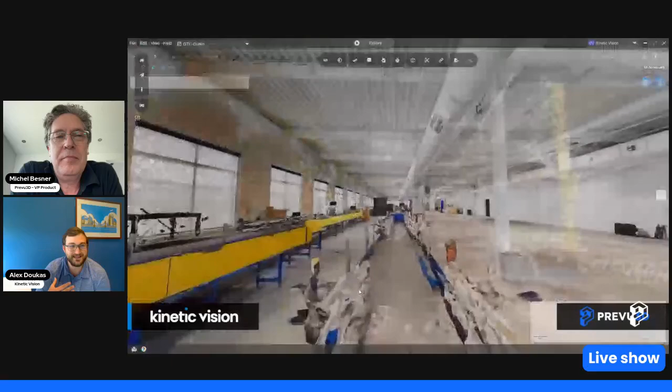So we actually presented this video at GTC. Like Michel mentioned earlier, we did a collaboration booth at NVIDIA's GTC. I actually personally got to meet Jensen Huang, which is amazing. We utilized a NavVis scanner, a VLX3 that we have at Kinetic Vision, to go ahead and digitize our upstairs manufacturing space.

So we have essentially a physical replicate of a conveyance line that we wanted to better understand, and basically replicate in a digital environment within the space. And the first place you start is with data acquisition.

We support a variety of different acquisition modalities. I think one of the most important parts of Kinetic Vision is that we use the right tool for the job, whether that's hardware or software. When it comes to hardware, understanding the problem statement is so important - understanding any accuracy requirements, what level of fidelity is needed, and different levels of transparency or complexity to different pieces of equipment or macro level environments you're trying to capture.

We utilize terrestrial scanners, like I mentioned, our VLX3, which is a SLAM-based LiDAR capturing system. We use photogrammetry, Gaussian splat, which is a newer technology that's really interesting - it's almost like an interpolation of photogrammetry. Again, using the right tool for the job, in this instance we're using our VLX3 to capture our upstairs space.

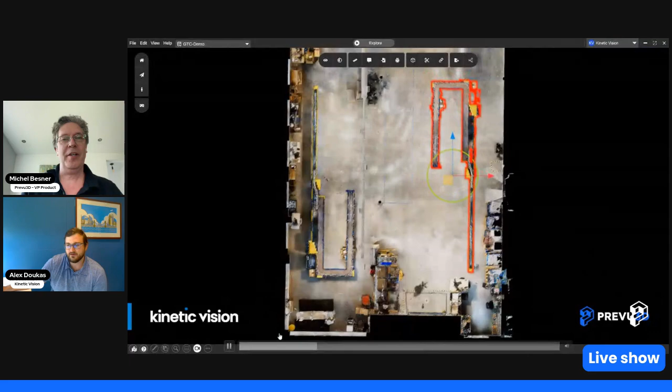From there, we utilize - and I'll play the video again here - Prevu3D to go ahead and actually activate the data.

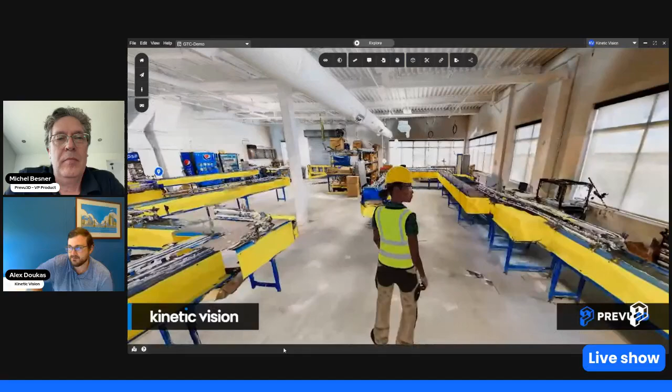So when I say activate, that can mean a few different things - anything from reconfiguration of different components, like you see on the screen here, to measuring, to sub-segmenting different things, to actually creating assets and annotations of different segments. This really just helps enable an immersive experience where anybody from VP level to boots on the ground can interactively engage with it.

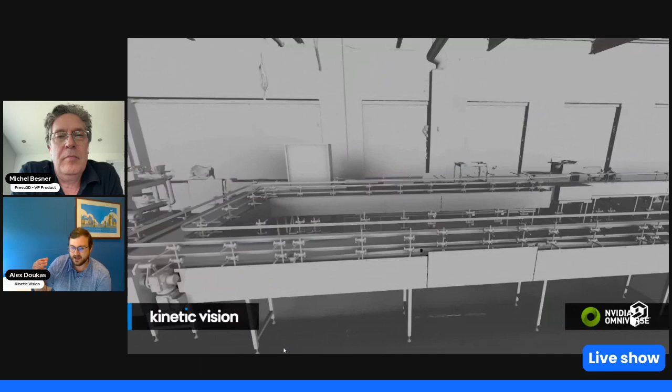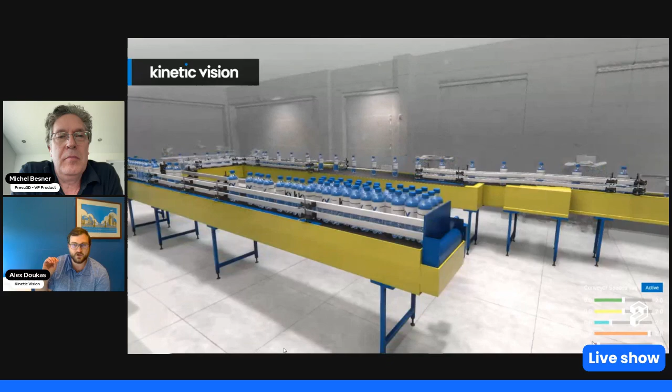And then we get on to the next stage where we focus on optimization. I mentioned COVID earlier - I think one of the biggest highlights we noticed is an industry shift or mentality shift from research and development to more of a focus on production optimization. Focusing on production optimization, R&D can help facilitate that.

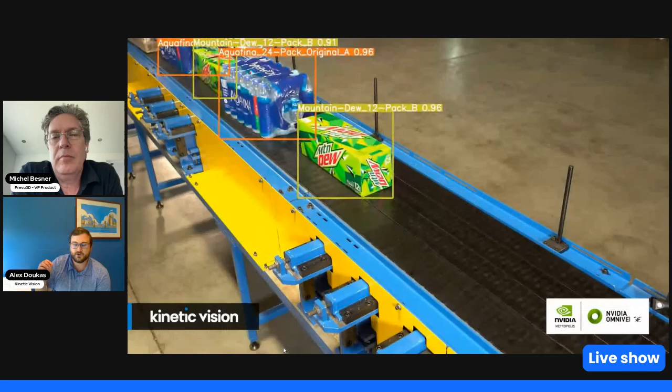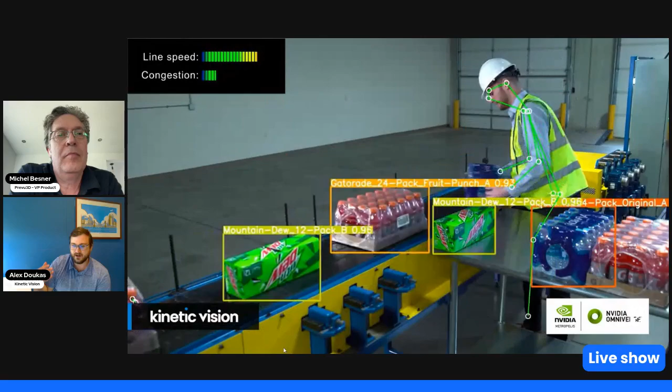We utilize tools like Omniverse, Unreal, Unity, to go ahead and create digitized representations of those different environments. So then you're able to actually activate them, optimize throughput, optimize how you're going to engage with that equipment, and then take it even a step further to do things like closed loop integration, closed loop PLC control, where you're using maybe AI or machine learning.

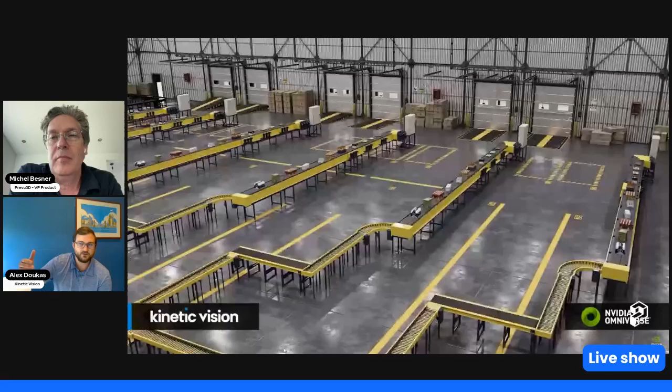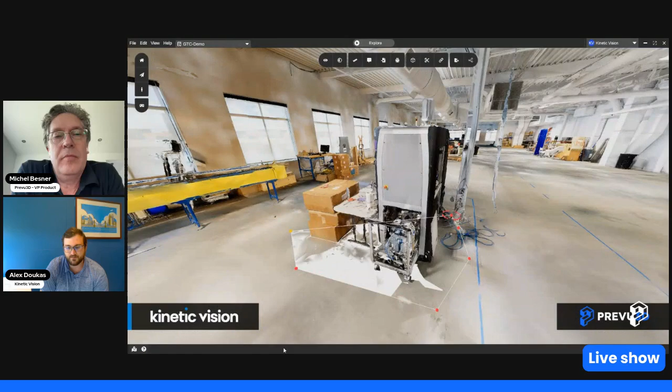You're using all the sensor infeeds from the data sources, from your lines, and then basically creating a centralized database to make decision making for you. So then you're not having to go ahead and tweak the dials based on need - you're allowing the system to act on its own, with more autonomy. That level of autonomy or integration really empowers production cells to not rely as heavily on their individuals, and it can make for a more efficient workflow.

Exactly. And what I love about what you were describing is that there's obviously a notion of choice and options in how things can be done. The word that comes to me is the notion of a trusted advisor. I think companies that want to digitize their facilities - there's not a single way of doing it, depending on the size, the complexity, the type of equipment you have, the type of use cases you want to address. I think that's definitely something I appreciate.

What your company is doing is really having this toolkit and these sets of different technologies and tools that, depending what you're trying to do, will be adapted. I think that's very important, because I feel we talk a lot about digital twin, but we often forget about talking about the maturity stage of a company.

And we assume that everybody is at the same stage. I like the example of a CRM, a customer relationship management system. Right now it's obvious most companies have a CRM because that's what you need to have, but 20 years ago it was still an optional thing, and it was very expensive if you wanted an SAP type of solution. Before companies like Salesforce.com came out with more accessible CRMs, it became basically commoditized. People now just have a CRM, there's some that are very affordable, and it's not a question anymore.

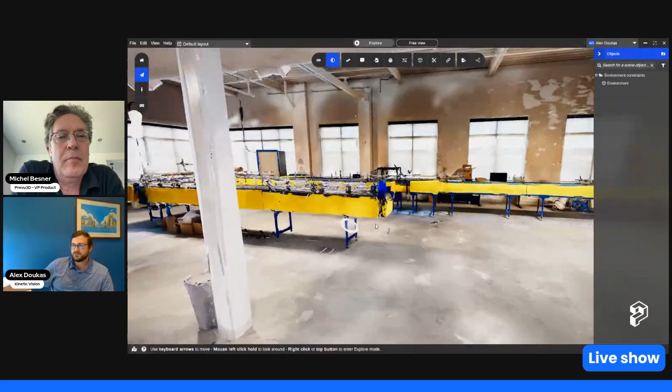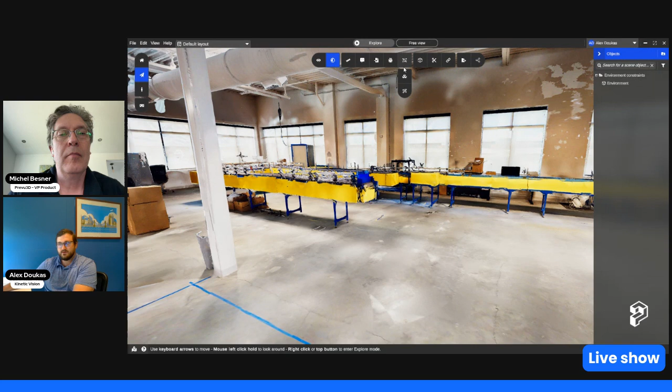So if I zoom into the actual scene here, you'll be able to see that conveyance line that we were looking at previously. You'll also see an ISBM system here that we work with in coordination with our line. But if we wanted to go ahead and utilize this data to recreate this asset, reconfigure it, or simply segment it out and use the segmented asset, there's a couple of different ways that we've used Prevu3D to skin that cat.

I've been really using the Asset Magic Wand lately to work through some more complex segmentation operations. So I'll go ahead and... there we go. I'll utilize this to select the different surfaces, and it's been a really nice tool to help visualize the actual segmented surface that I'm about to extract for digital twin development.

It is very quick, yeah. And then you can go ahead and start to define the different components that you want included. And then I can rotate it so I can see what's being included down here.

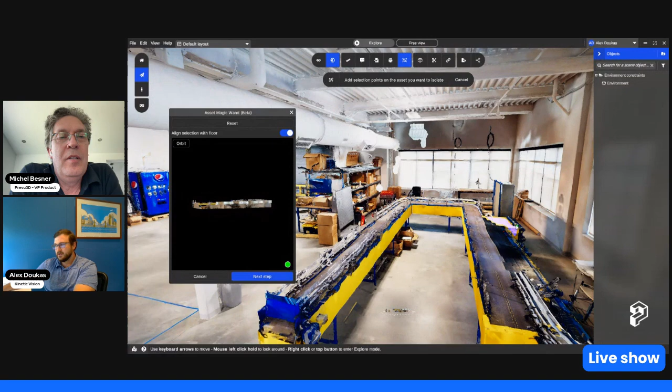And I think it's a great example because assets in manufacturing sites are complex in shape. There's a lot of solutions out there that use a single rectangle to define the asset, but here you're able to define a much more complex environment with just a few clicks. That's exactly right. We've likely captured a majority of it at this point, which is great.

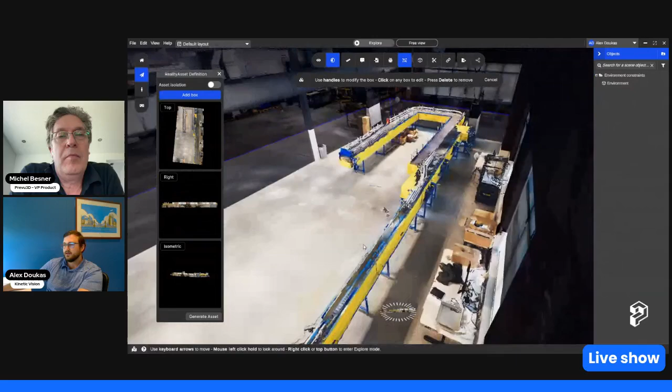So then you have that defined as an asset, and you can go ahead and even redefine the bounding box should you want to. So I can go ahead and rotate this. Just like you said, this allows a lot more flexibility. You can also do this with the box methodology or even the cut methodology.

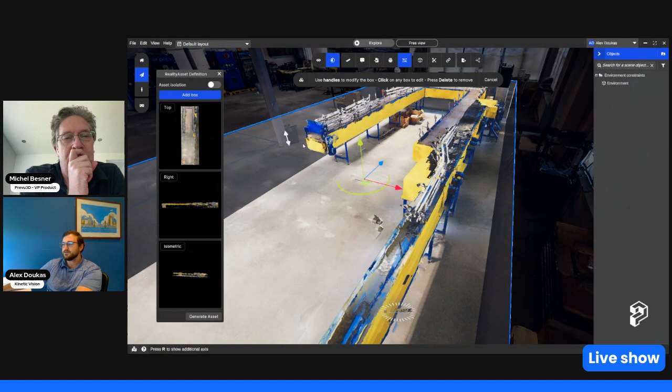But this is a great way to have the asset recognized as an asset, and then utilize this. Let's say someone is trying to understand where this conveyance line is among a 1.5 million square foot facility. They would have the ability to search based on the name, but then we can add different things like different properties. We can add different components. We can say line speed.

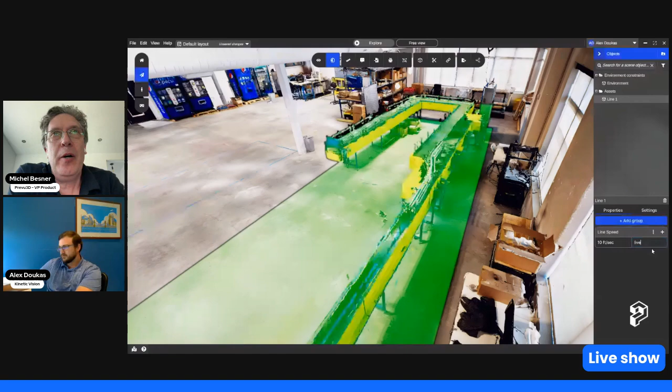Let's do 10. It's a great example you're showing because one of our ideas is exactly that: to allow any form of parameterization to be possible. There's so many things you want to document, and it could be linked to specific performance criteria on that specific conveyance belt, or to other information.

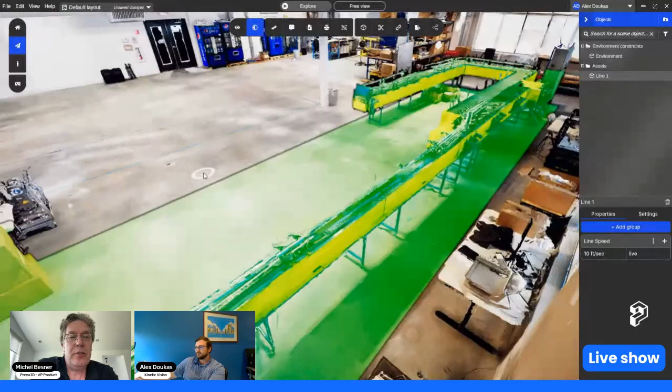We're seeing a lot of people showing interest in doing asset inspection planning. Like if you want to start tagging some of your piping and say, what are the areas of piping that I need scaffolding to inspect. So there's a lot of ways to start attaching parameters to those assets and making this a fully searchable experience.

That's exactly right, and that's how we have folks engaging with that as well. And then let's say you want to cut it out, I'll delete this for now. If let's say you want to go with a more traditional box-based reality capture, this is also a really easy way for us to come in here.

And if I go over here, I can go ahead and redefine, starting with the floor. Go ahead and bear with me—it's always nerve-wracking to do a live demonstration during a webinar. There we go, there we are, okay, perfect.

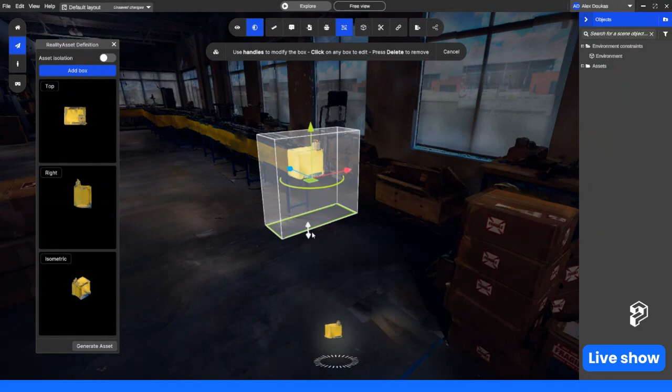And I actually don't want to capture the floor. If I just want to cut it out, there you go—if I just want to capture a section of it. So then if I want to extrapolate this out, I can generate that asset. I can say conveyance line segment.

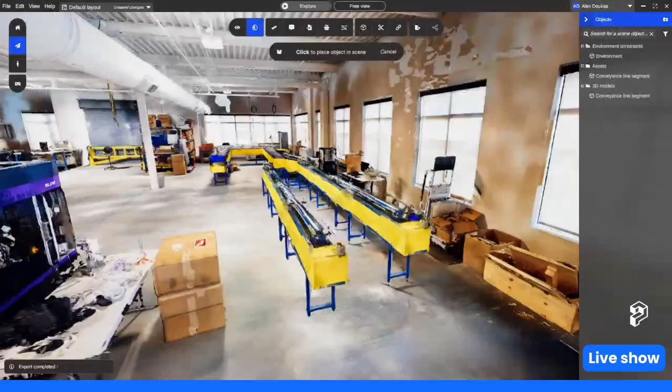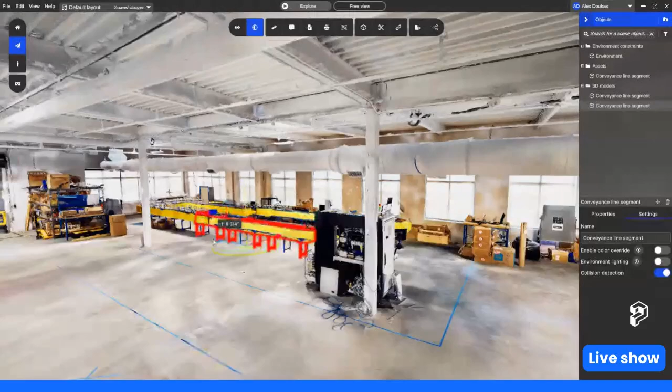And then that's where you can go ahead and duplicate this. So if you want to add on to that, if you wanted to make a few additional subsegments of the line, that's where we're having customers really use this from a configuration perspective. There we go.

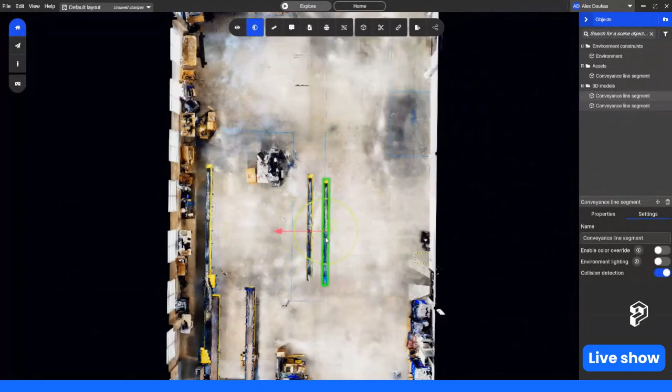This is great. Anybody have questions? Don't be shy. I know that no question is a stupid question—it's for us to help understand how we can assist you with this type of situation.

And again, I think it's great that you're showing this here because it's one of the values of our product—it's very fluid and interactive. It's almost like playing a game in the manufacturing space. You're able to move, edit space, and it's not as cumbersome as other traditional 3D tools have been in the past.

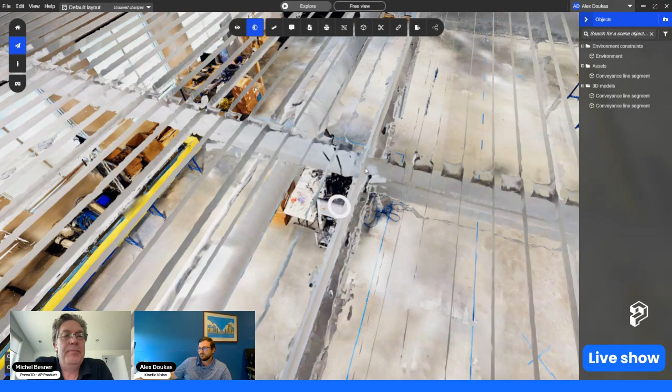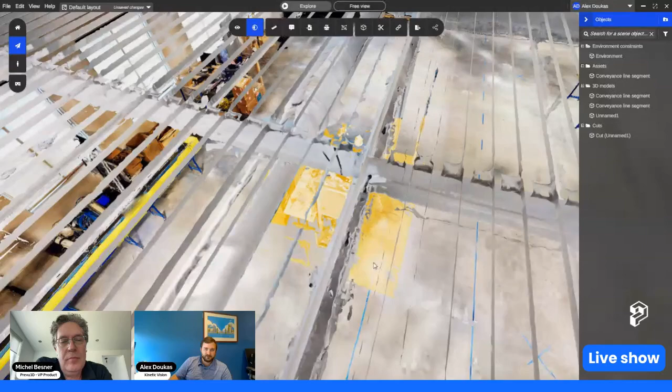It's really making it easier to change things. That's right, and that's the thing that really resonates with a lot of the customers we help serve. Usability is a big factor. You want a boots-on-the-ground individual to be able to interact with this, for anything from a warehouse reconfiguration all the way to a VP of operations who wants to verify that if they buy another $20 million of capital equipment, they can get these new pieces of equipment into the space accurately and safely. It's a great way for all walks of life to utilize the data from that perspective.

Yeah, it's really helpful. And also, as you mentioned, I think a lot of companies are not yet realizing how many use cases you can cover with such a digital twin. Obviously right now we're very much in the engineering area, where we're designing the space and changing the layout of the facility.

But once you're deploying this type of digital twin, there's so many things you can think about doing. Like I said before, you could start documenting health and safety hazards, or instruction manuals, or link your learning management system, or link your other enterprise systems that you want to make accessible within this environment.

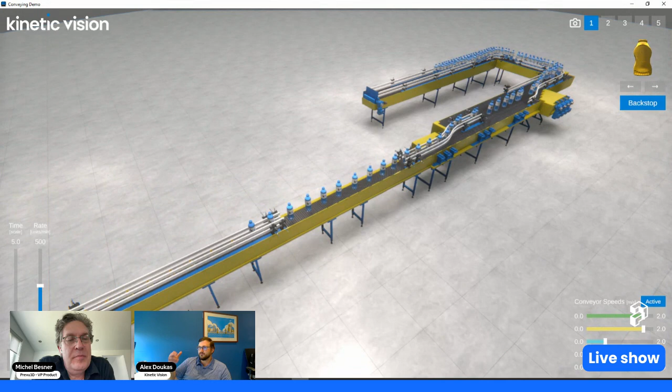We work with some of the biggest vendors to do what we'll call pre-manufacturing floor deployments, where we're utilizing synthetically developed fields of view to understand: is this going to be the right camera for this application? Is this the right spot in space for me to, let's say, count bottles? So if I deploy a camera right here and want to capture 5 feet of data, do I have the right megapixel camera for that deployment?

On top of that, we can also utilize these assets that are being created to go ahead and create synthetically generated defects or anomalies. So if you want to indicate a tip-over, and when that bottle is tipped over, indicate to the camera system that you have a failure, you can essentially pre-train that model prior to it ever being deployed in the actual production facility, which is amazing. It doesn't take days or months of training—it takes literally all the days prior to you actually going to deployment, and you're able to do that all ahead of time, which really accelerates the implementation curve.

We have a question here from Staffan asking, is it possible to export the captured parts? Absolutely—that's actually the one example Alex is showing here right now.

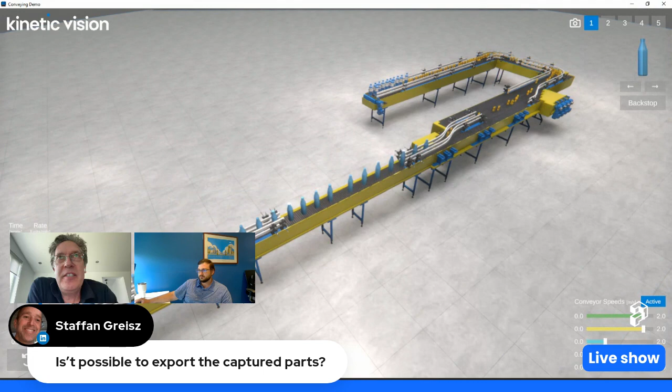Like any asset you've created into Prevu3D, you can export in a wide array of file formats, from USD for Omniverse to OBJ, FBX, GLB file formats. There's also a STEP file. I don't have the list in front of me, but there's a very long, extensive list of file formats we support to export the assets into other systems. It's a great question.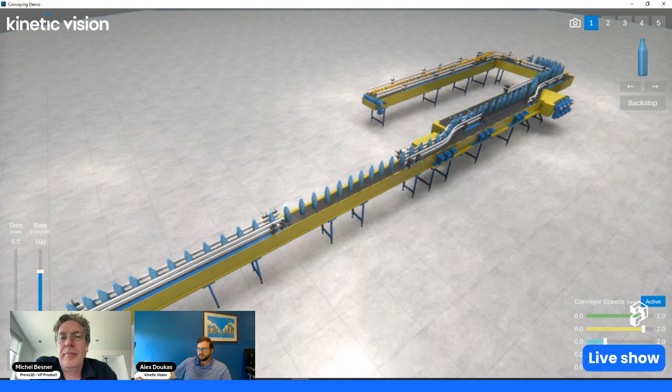Absolutely. I mean, like you said, it's all about how we can move data across different systems. There are solutions that are very CAD engineering related, and simulation tools like Omniverse, and you're seeing there's not a single tool where you do everything. It's more about this ecosystem and how you flow information across the different solutions to accelerate your design engineering all the way to your maintenance and operation processes in the company.

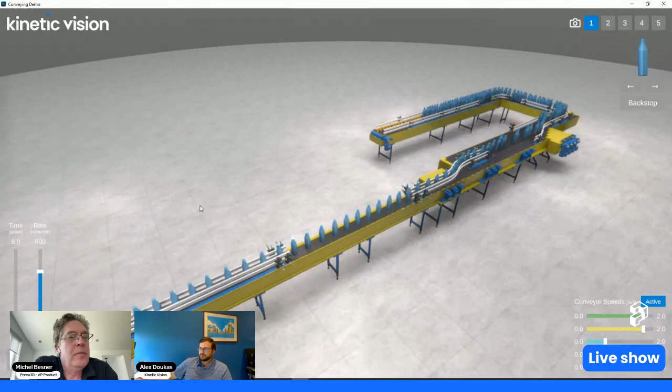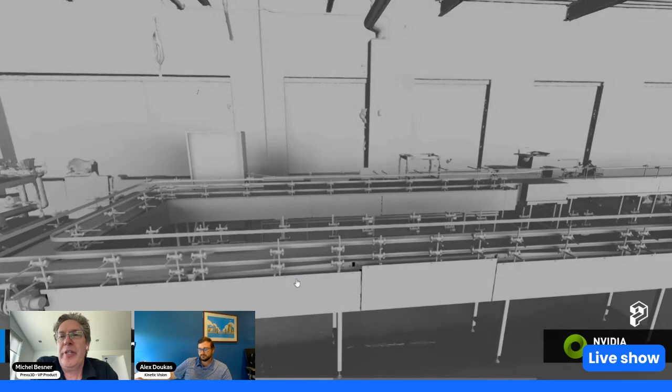This is really great to show because, when I first met Kinetic Vision, I didn't realize how deep you were getting into the manufacturing process. And that's a really great example you're showing here today for people to appreciate how much you're able to help. And so you have another video here.

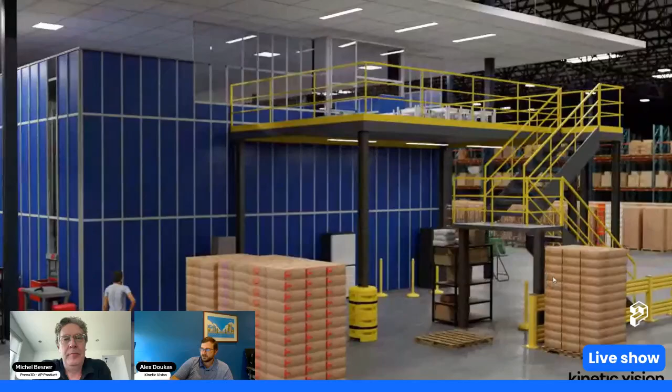This is nice. And I was mentioning full scale deployments—we have a really great partner that's a publicly recognized partner in PepsiCo. We actually presented at GTC in the keynote two years ago, and this was part of that keynote where we showcased one of their AutoStore deployments. We utilized Omniverse to really represent a scanned asset—we scanned this entire facility and used Omniverse to understand workflows of products and workflows of people interacting with the automated routine of the AutoStore.

This was just a really great example of how far you can deploy this beyond just a single line that I was showing you previously. This is an entire warehouse, and this really gives you the ability to understand the bigger picture of how this can be influential.

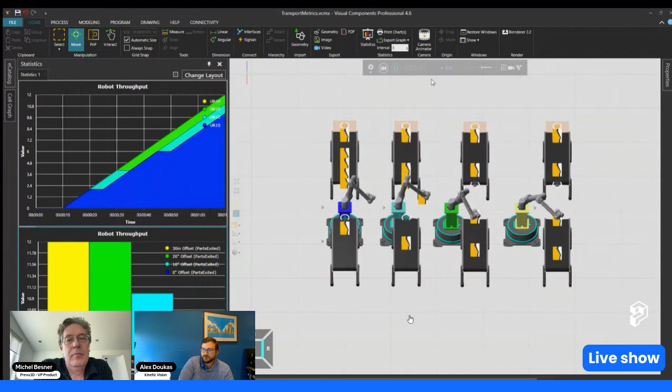And then we utilize the data that we have presented there with a couple other programs. This is using Visual Components to understand flow of products, dependent upon which robotic system and length of robotic arm you're utilizing, and then utilizing some of that data also for flow of people and product relative to output or export of that good.

So there's a number of ways you can utilize Prevu3D to really help enable this entire process. It's a major step in our process to get us from the position where you don't have CAD assets. You need to go scan the facility, utilize the scanning methodology to acquire it, activate it with Prevu3D, and then do different activities after the fact to help optimize and enable different ways to optimize.

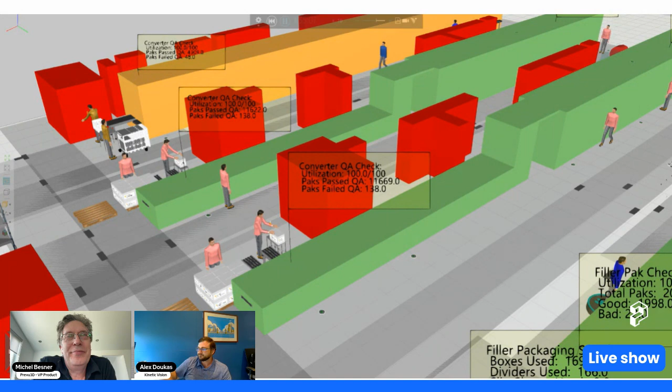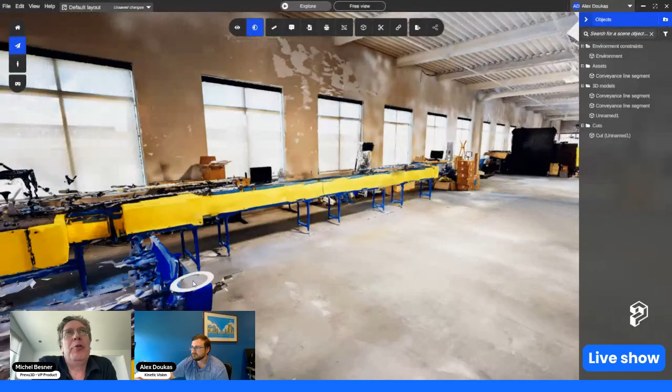So it's a great summary, and I think it's an important point because as part of our vision at Prevu3D, it's all about starting with the first single version of the truth, which is the scan itself. Because you can't cheat what's on the scan, it is what it is. So starting from there and then being able to take this data, creating the relevant assets, going to different other environments to do your different processes into the workflow, I think is a key fundamental change that we're seeing.

And it's pretty exciting for us, working with Kinetic Vision and a lot of the customers we work together with, that there's really this understanding that reality can be used in so many ways. And again, if you look at a CAD environment and you see the same thing translated into a reality capture based mesh model into Prevu3D, you better understand the context when you see the richness of a reality capture environment like we're seeing here.

I'd actually have a question for the field. If anyone's dabbling in the digital twin space, I'd be interested to know how you're leveraging digital twins, or how you plan to implement digital twins. So if anybody has a potential use case or example, we'd love to hear it, and love to maybe probe how Prevu3D could be a part of that. Absolutely, anybody wants to comment on that, we can definitely exchange about this.

Meanwhile, we do have another question from Adam. He's asking, after scanning the site, do you have a better process to optimize, or do you have a 3D team that does it manually to run it into the game engine? Obviously the scan mesh assets have imperfections from the scanning process, which is not a perfect element. I know that you have some artists working at Kinetic Vision to help you create the models for the CAD area of things. That's right, that's exactly right.